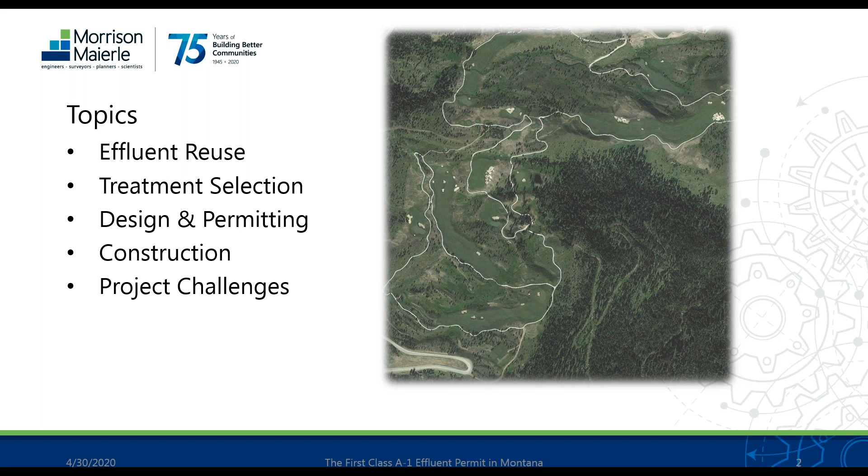So just starting in on the Class A1 standard, and to give us a little background on why we ended up using it. The Circular DEQ2 Appendix B includes Class A1 standards, and that dates back to 2012. Prior to that, landscape irrigation projects were in Chapter 120 of Circular DEQ2, and that had more limitations, specifically to agronomic uptake with respect to nitrogen.

And with this Class A1 standard, one of the main reasons we looked at it was that we would be able to open up some opportunities with either landscape irrigation, groundwater discharge, or even looking forward to a surface water permit later.

Some of the high points I'll point out are BOD and TSS need to be 10 milligrams per liter or less. The total coliform, we're looking at 2.2 CFU per 100 milliliters or less. Total nitrogen being 5 milligrams per liter or less. And then the filtration requirement keeping us at 2 NTU, which isn't listed here, but it's implied. One of the advantages of Class A1 effluent is related to the groundwater discharge permitting that's typical, and if meeting the Class A1 standard, that is waived.

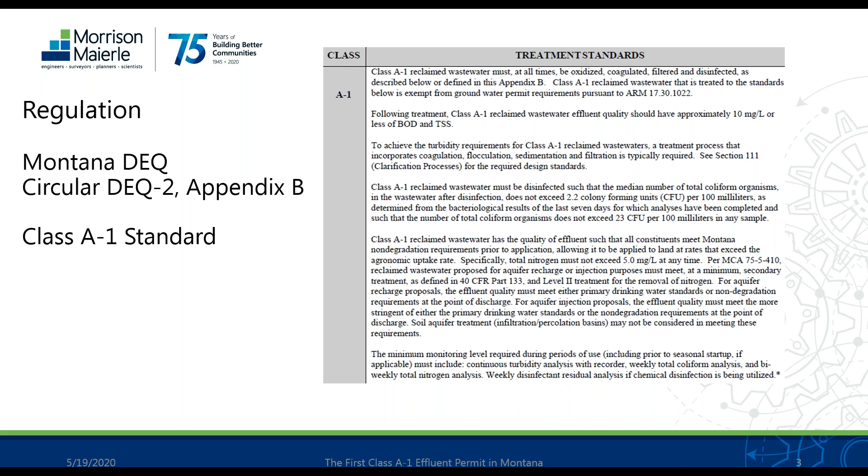So a few of the ways that we can take care of our effluent are on the A1 list here. There's quite a few, and I won't go through them all. I just wanted to put them up so that you can see that there's a lot of yeses under A1 in that column. And some of the ones we focused on were landscape irrigation, groundwater type discharges, and stream flow augmentation, although that would require a surface water permitting effort. And then snowmaking is listed at the bottom there, and that's an ongoing discussion in Big Sky.

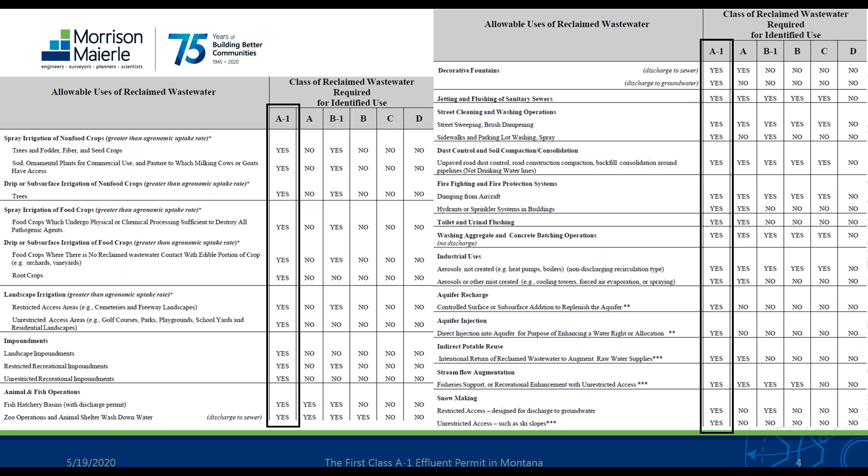So Moonlight Basin Resort has been growing, and it originally started small, so the first plant there was a trickling filter system, and then it had a nearby drain field. Later on, as growth occurred, they put in a traditional collection system and an oxidation ditch treatment plant, and that discharges to a storage pond and goes to forest irrigation.

So the reason for the new plant was really to increase capacity as the development occurs, and also look for a better way to dispose of the effluent as opposed to the forest irrigation, which is at agronomic limits and requires a 200-foot setback. And another reason is Moonlight Basin is committed to using their water resources to the best of their abilities, and so this effluent is an important part of water use on the property.

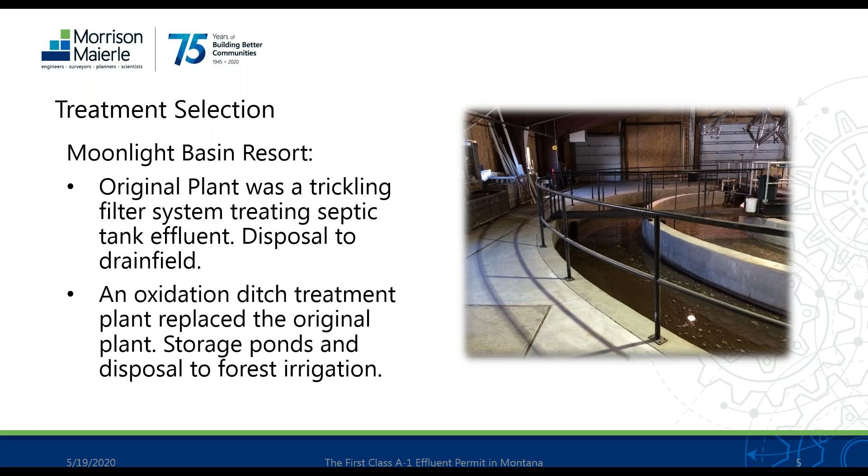So we started out by looking at different treatment options and different disposal options, and in 2015 we finished up a preliminary engineering report. It included growth planning to handle their expanding development, and that would occur over a 20-year period.

We looked at the three drainage basins that traverse over the Moonlight Basin property and how to handle those. Each basin could either have a discharge or an outfall to its own plant, or all the basins could be piped together with lift stations and force mains to have a common single plant. So those options were looked at and considered and then scored.

So as I mentioned, if we were able to bring all the wastewater together into one area, we could do a single MBR. Other options all included using the existing oxidation ditch for one of the existing service areas, and then putting in either oxidation ditches, SBRs, or MBRs for the other 2 treatment sites.

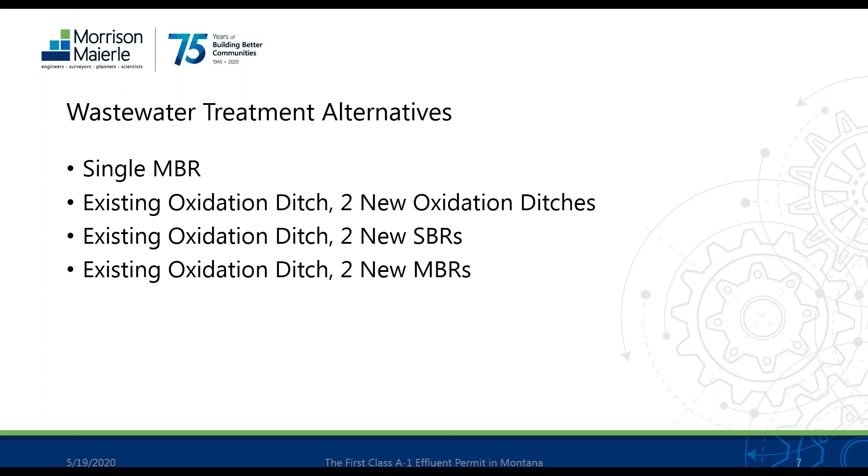So the discharge options I mentioned, the golf irrigation, surface water discharge, and groundwater discharge, each have their own challenges. The golf or landscape irrigation is limited to what the golf course can handle as far as an annual flow, and that's approximately 20 million gallons a year. So that works for a period of time, but as growth occurs and the plants are expanded, that will eventually be one component of potentially many.

On the surface water discharge, there are challenges with that as far as non-degradation with respect to changing the stream flow rate, nutrients, and then temperature. And there can be future study on that. We looked at that as more of a feasibility at this point, and trying to set it up for future consideration.

And the groundwater discharge, we spent some time there exploring the property and looking for sites where there were soils that had infiltration that could handle the quantity of water we were looking at. We weren't able to find any where a large scale drain field or infiltration area could occur at that time. And again, that's something that's going to be, I'm sure, part of the future consideration in studies.

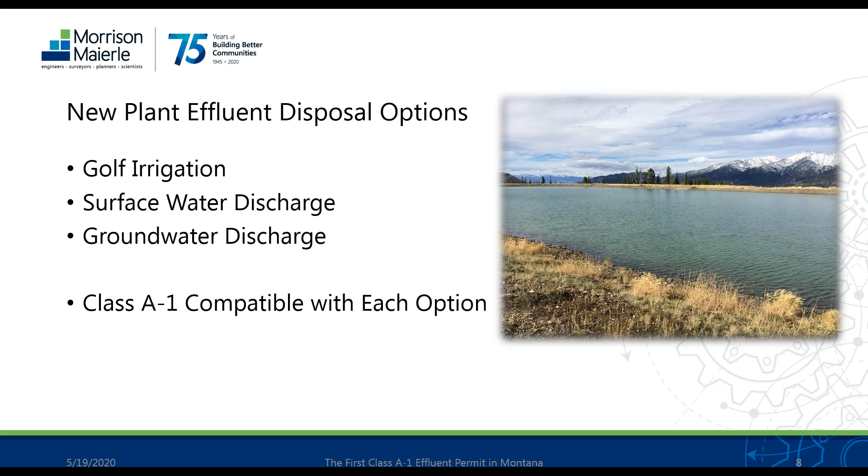On the selection, we chose the existing oxidation ditch and 2 new MBRs. This is just a ranking table that was part of our preliminary engineering report, and it just gives you some of the comparison parameters there that were used to make that decision.

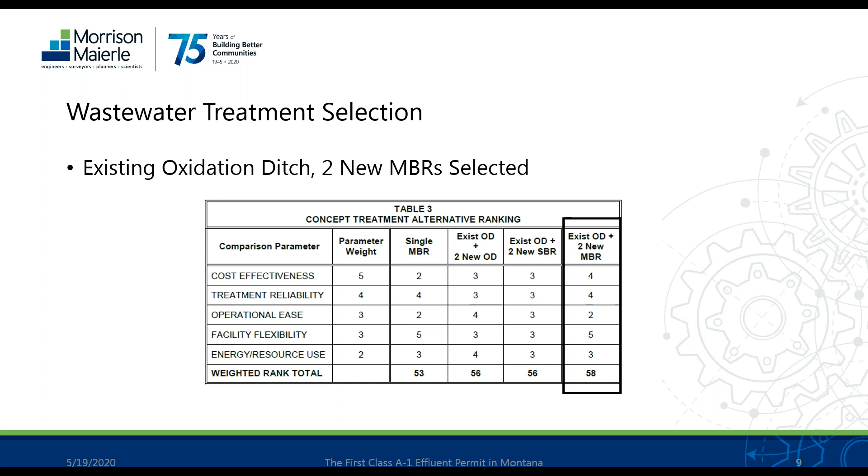So moving on into the actual design, we chose to use a pre-selection approach because of the specifics that the MBR manufacturers have for each of their systems. We wanted to have a competitive selection to protect the client's interests so that they get the best product and the best value, and that also meets funding agency requirements, although this project is privately funded.

So we worked with 3 manufacturers that we're familiar with and that have installations in the state of Montana, and we had them submit their information in an RFP and then conducted interviews as part of that process. And we had good client participation in the process. That was a really great thing. And in the end, 3 engineers reviewed and scored the proposals, and we did that independent of each other and then compiled that scoring at the end.

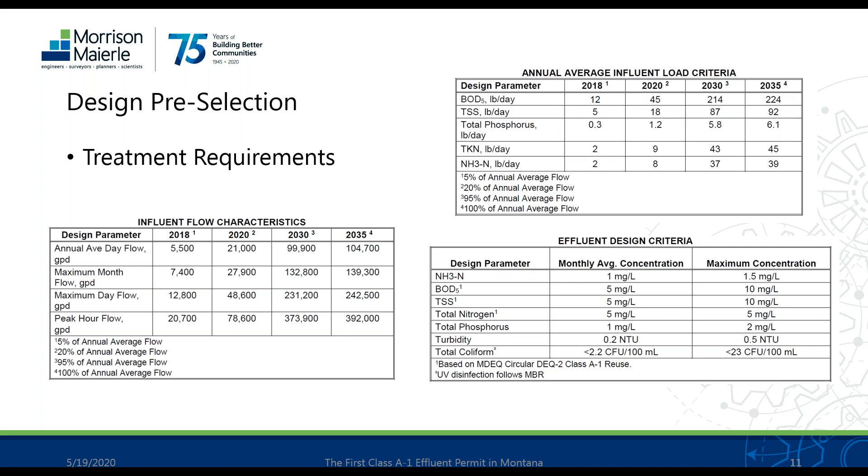Let's see, next slide. So on the MBR requirements, here's just another table out of the RFP. And one of the things I'll point out is we chose to have 3 membrane trains. And the main reason for that was trying to decide how we could handle phasing and how we could handle those low flows. And we decided that it would be a better alternative to have 3 trains, 2 initially, and then the third could be added later. So we start out with 1 duty, 1 standby, and in the future we'll have 2 duty, 1 standby.

All manufacturers needed to provide ultrafiltration in their membranes, and the rest of the parameters just kept us close so that each one could be compared. If they were going to deviate from this, we asked that they have a discussion with us, and we did work on some addendums through the project, although these did not change.

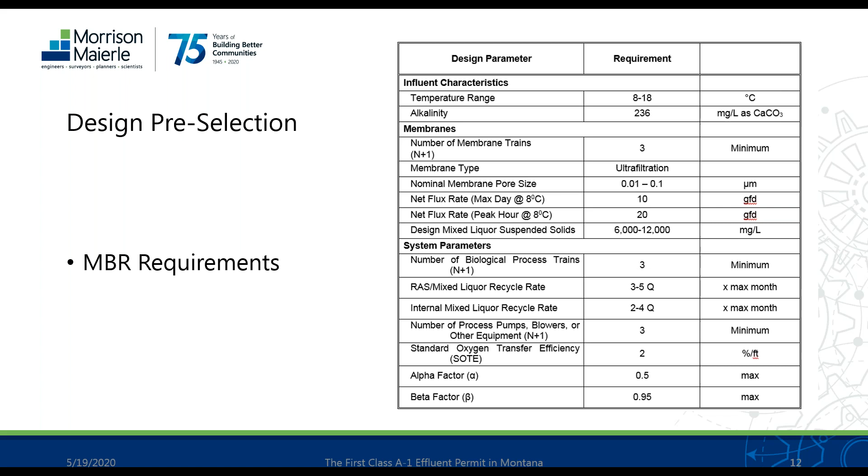So ultimately, GE, or now Suez, was selected for this project, and they provided a system, as I said, with the 3 trains, bioreactors, and membrane basins. They had a 4-stage process, so they have a pre-anoxic, aerobic, post-anoxic, and then an aerobic membrane basin, and that's due to the air scour that goes on in that basin.

They had process chemicals, sodium hydroxide, MicroC, and alum for pH adjustment, carbon source, and then if we needed to remove phosphorus for the alum. On the membrane chemical systems, fairly standard with sodium hypochlorite and citric acid that can be used periodically or on a larger scale, maintenance clean, or drain and clean over the course of operations. And they have a reinforced hollow fiber PVDF membrane. It's a ZeeWeed ZW500.

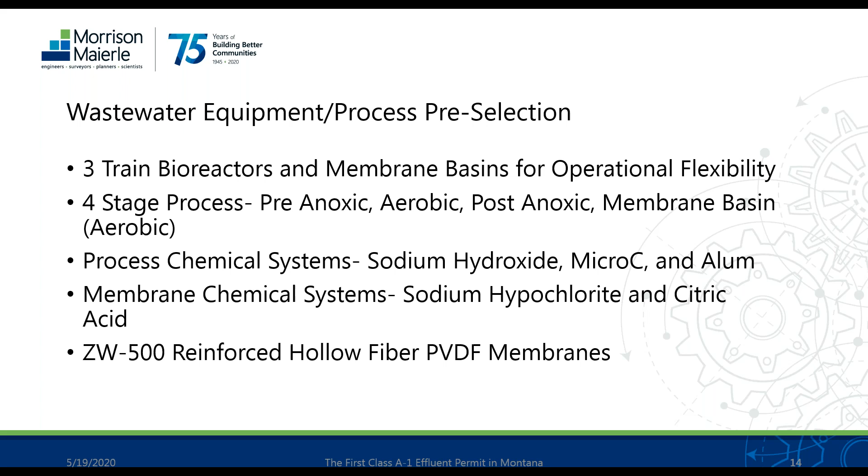So the process that they submitted is shown here. This is a BioWin output representation. So the first anoxic one is 8,300 gallons. The aerobic 1 and 2, they just split them up, but the total is 16,000 gallons. And anoxic 2 and 3 are also split, but total to be 8,300 gallons. We took and reviewed this BioWin output and created our own model to verify the outputs. And that was done for each manufacturer actually to verify.

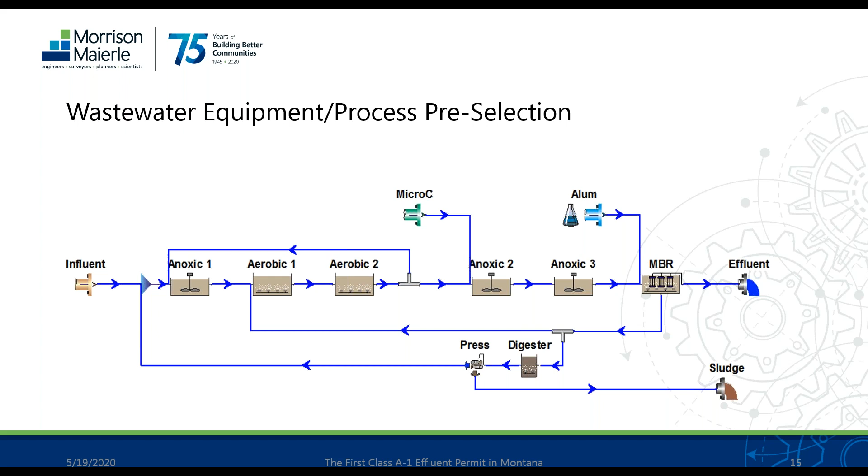So the Moonlight Basin area, this is just an aerial view showing the relation of the existing parts and the new parts. The existing oxidation ditch and effluent pond are over on the right hand side, and adjacent to that is where the forest irrigation has been occurring. So there's a force main coming up to that plant from down below at one of the lodge areas for the ski area, and that flow along with the central and northern service area will be reversed and sent to the new plant that this project is talking about.

And then pond 3 over on the left-hand side is a 16 million gallon pond that currently is filled with water from Lone Creek on a surface water right and irrigated onto the golf course just to the north of that. And we were able to connect onto a pipeline and send water up to that pond 3 area, and that will become the discharge point for golf course irrigation.

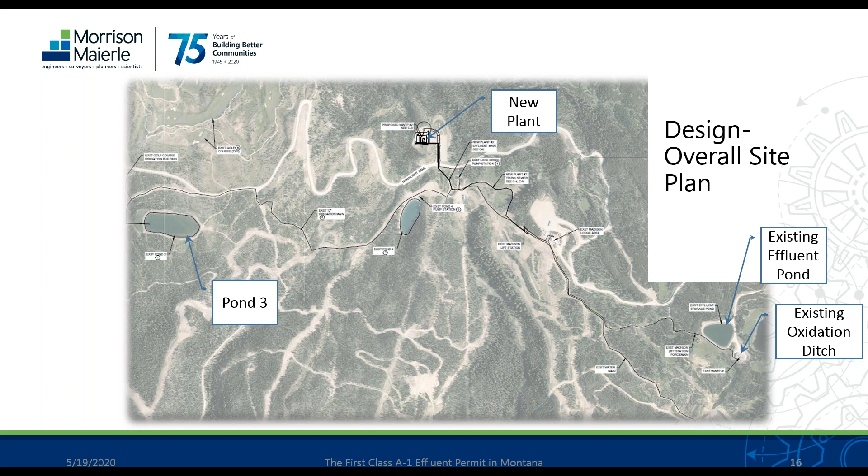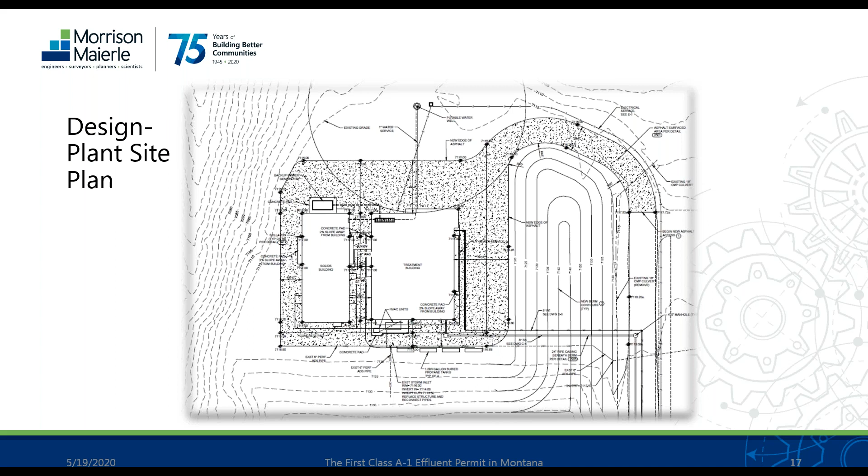So just a couple things to talk about on the plant site plan. Although the building is set up to be seen, it had a lot of architectural items on it to help with the view shed. But one of the improvements to the site was this berm on the right-hand side of the plant, and that just keeps the plant from being a central focus of the view shed looking down. The plant site was already flattened as a previous project, and we ended up putting 2 buildings on, one for treatment, one for solids, and all the processes are inside or under roofs, and this site plan allows space for snow removal and adequate access.

So the plant process flow diagram shown here gives you an idea of some of the processes that are going on. So influent enters the plant, it goes through fine screens, through vortex grit, into an influent pump station, and from there it's lifted up into the bioreactor splitter box. It overflows by adjustable gates into the 3 bioreactors, and then into the membrane basins. Filtrate has to be pumped out of the membrane basins through the UV reactor and into the effluent basins, which supply NPW, back pulse, and effluent discharge.

On the return sludge streams, those are all pumped in the bioreactor, and the waste stream is pumped to the digesters in the solids building. Solids can be pumped from the digesters into the dewatering press or to load a truck. You can see here we have land application either by liquid or by cake.

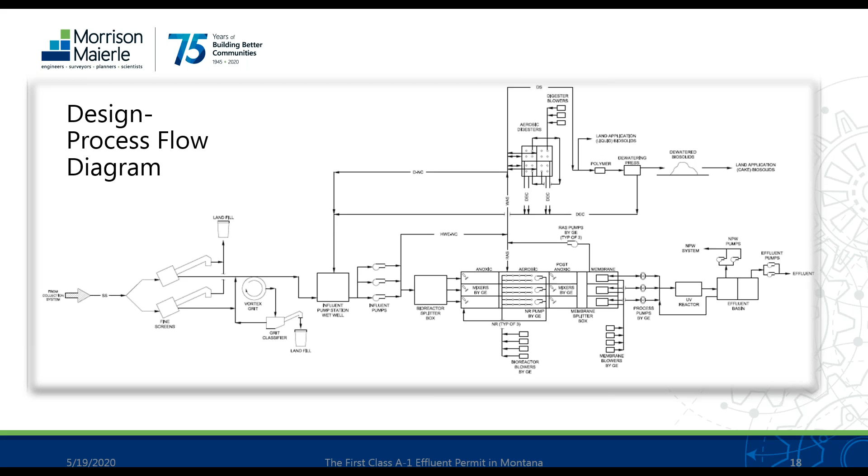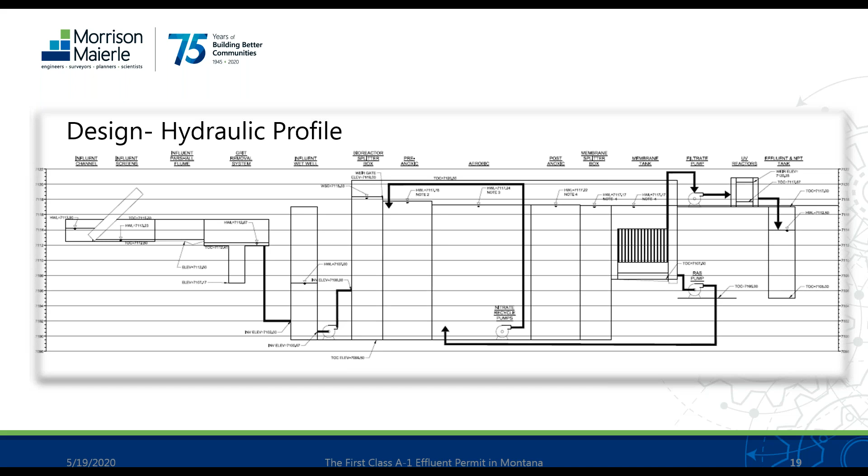So the plant layout, this is the main building. We, like I mentioned, kept the processes under a roof and heated in this case, just due to the climate and the snow load that there would be, and icing. So on the upper right, we have our headworks, which is separate from the rest of the building. It's ventilated at 12 air changes per hour, and it's a Class 1 Div 2 space. Then the rest of the plant is unclassified.

The chemical feed areas are separate off to the bottom right, and mostly each chemical has its own area. There are a couple chemicals that are allowed to be together; there's not an incompatibility issue there. We provided an office, laboratory, restroom, and laundry area for the operators on the upper left. And then there's a dedicated electrical room.

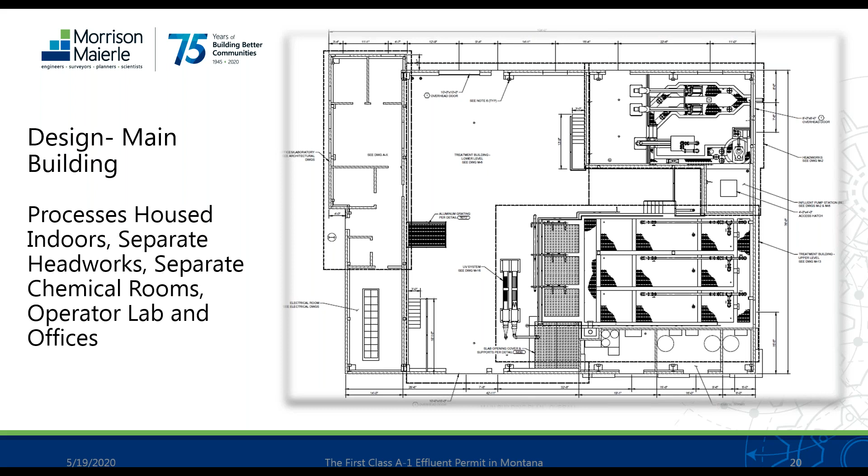So underneath that level, there is a lower level, and this is to help with providing flooded suction to our pumping systems. And so on the right-hand side, you can see the 3 influent pumps. They're able to be in a dry pit configuration, taking water from the influent pump station wet well. On the membrane area, we're able to pump mixed liquor out of the membrane basins in a flooded suction configuration. And then on the NPW and effluent pump skids, we're able to also pull those out with flooded suction.

So the lower level utilized the footprint the best way we could, staying under that roof and being protected in a heated and separate space.

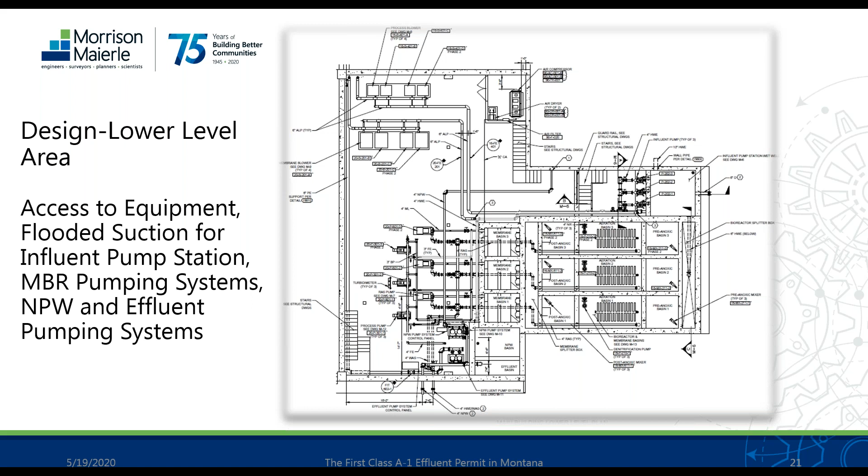This is the solids building. So we have 4 20 by 20 dimension aerobic digesters with fine bubble diffusers. Then we have a piping gallery, which was also designed to allow operations of the valves, either moving water in or out of the digesters without having freezing issues or searching for a valve under a snowdrift or those types of things. And then we have a positive displacement pump down in that gallery in a flooded suction configuration that can feed our screw press. And then on the left-hand side, our digester blowers feed air to the basins and the diffusers.

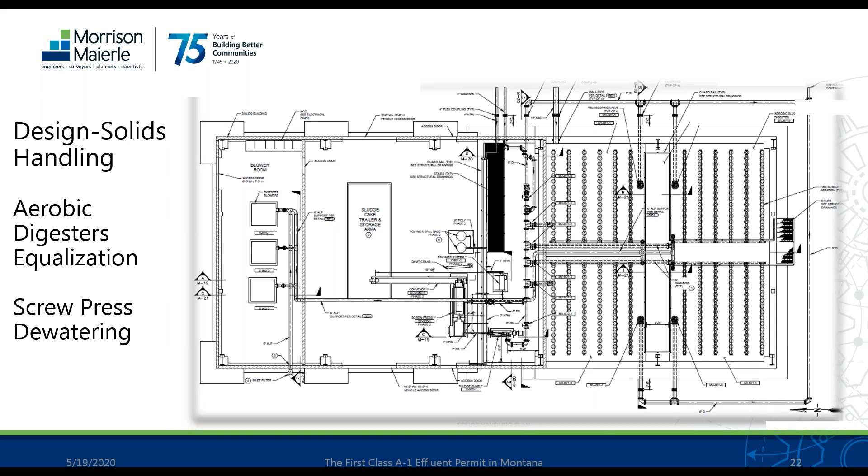So permitting of the project, we worked through plans and specs and finished with a submittal to DEQ in August of 2016. And while it was under review, we were asked about information on the storage pond 3 and the golf course irrigation. And so we spent some time going through that, doing some further study, and having a geotechnical report put together for the pond, and then also looking at the golf course and where the sprinkler heads are aimed, and making sure that we don't discharge water to a surface water drainage. And so on January 23rd, 2017, we had our DEQ approval for the project.

So this photo here was just showing doing a leakage test on that pond 3 liner. So as part of the permit, here are the monitoring requirements. Since it's not a groundwater discharge permit or a surface water discharge permit, these were written into the actual approval for the plant. And you can see that in year 1, there's a lot more sampling, and then it tapers off at 4 and beyond.

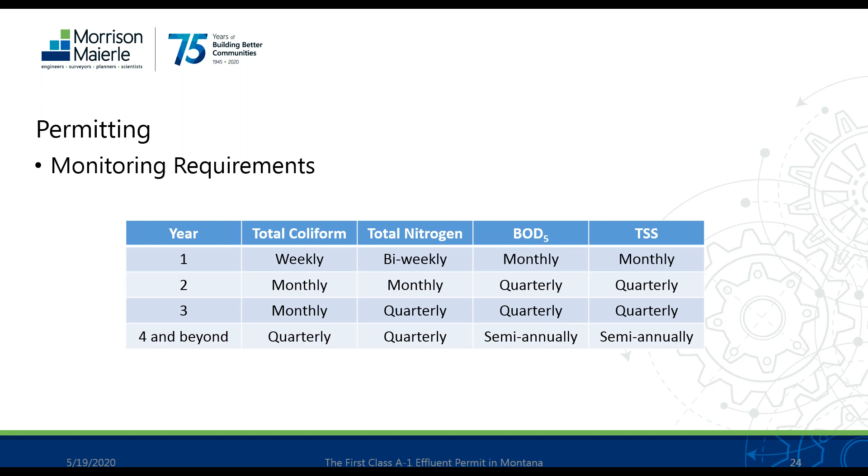So construction of the project, after a pause of approximately a year, just due to development needs and the client programming this project, we started into the construction with bids due in January 2018, and Dick Anderson Construction was the low bidder. And over the course of the next few months until May, we worked through budget issues and some value engineering; when they looked at the site and how things were going to go together, they had some ideas, and that gave us enough time to begin work in May 2018 after ski season was finished and when weather permitted.

So the project was completed in November 2019, and the final amount was 8.63 million. And the photo here just shows about 1 or 2 days into it, just clearing the site and starting to dig for the large water holding basins.

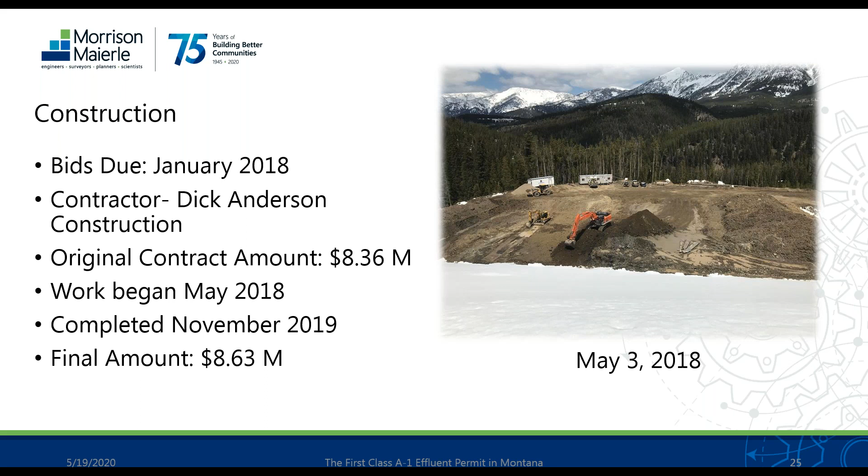So one of the nice things about this site is the hillside behind it provides a really good place to take photos, and so we were able to pick up a good timeline on the project, and you can see in the first couple months here, July and August, as structures started going up, they focused on the solids building, as it was a little bit simpler construction and not quite as deep, and then they moved to the bioreactors, which are 18.5 feet water depth, and started building those up.

One of the design aspects that we focused on was providing a base slab that we could then build up off of and try to limit sequencing as best we could, because each pour requires curing and then concrete breaks to move to the next level or a backfill. So keeping sequencing down was an important part of that design.

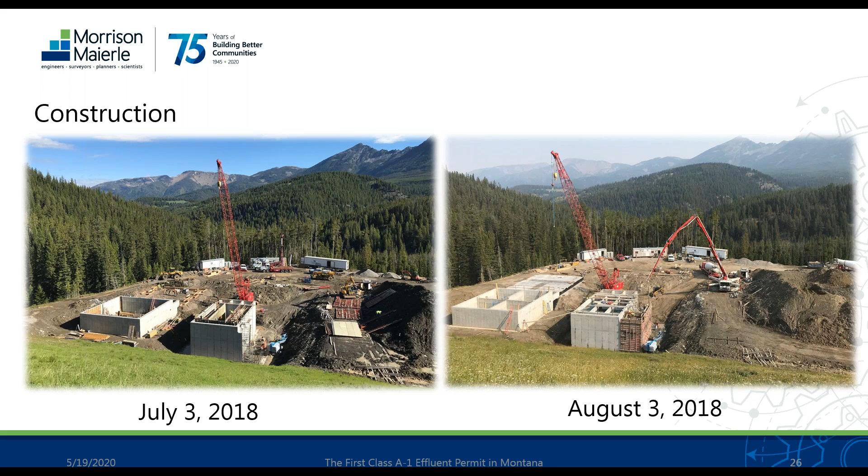So moving into the next few months, you can see that water testing occurred in the digesters, and we started to see the treatment building coming up out of the ground. And on the September photo, you can see the steel structure that forms the floor between the ground level and the lower level, and that structure allows for vehicles to be driven through that bay on the north end of the bioreactors. And then in October, you can see the building going up over the solids area, and then in the main building, we can see some of the structure work in the headworks. You can see the screening channels taking shape on the lower right, and then the gravity sewer was being installed.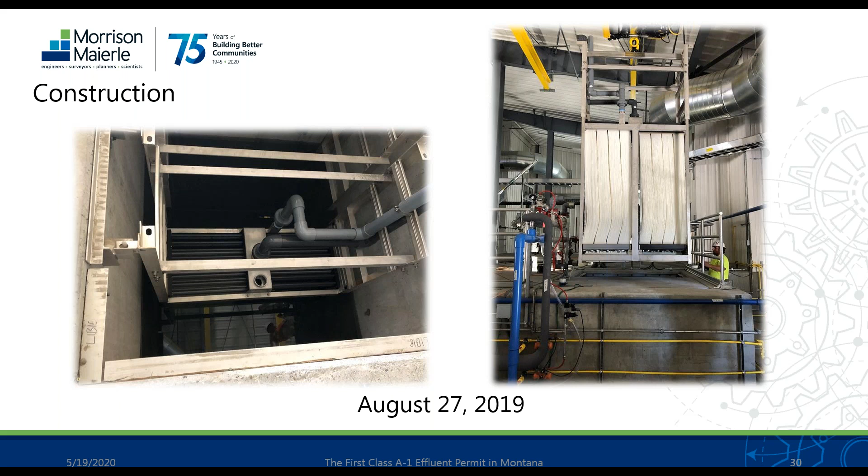So at the end of September, equipment was started up and they were able to start seeding the plant. And so, like I mentioned before, the volume of one train of the basins is approximately 32,000 gallons. And so that was brought up from the Big Sky County Water and Sewer District, and they have an SBR treatment plant approximately 8 miles away in the Meadow Village.

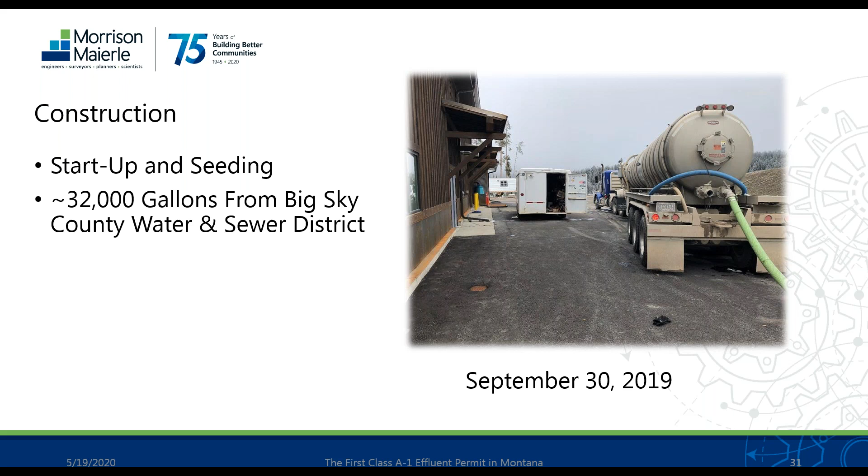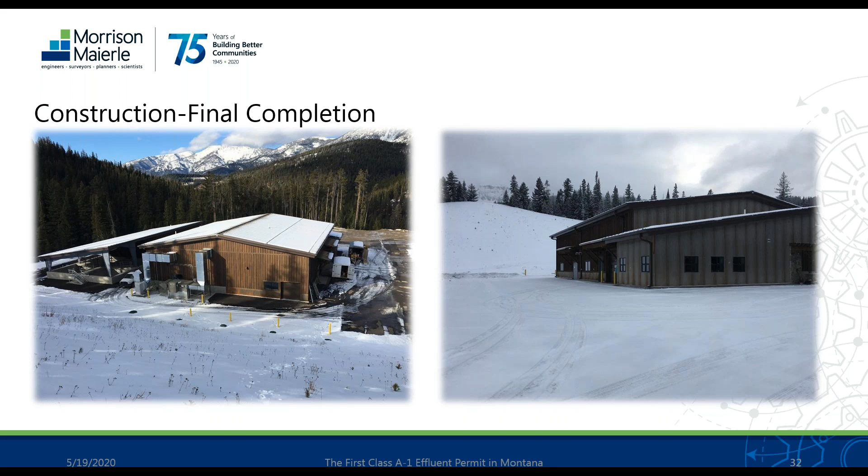So this is the plant when it was completed, and you can see that the building has a lot of those architectural elements I mentioned to fit in with the area, and most people who have seen it don't attribute it to being a wastewater plant at all. So we'll go through a few photos of some of the systems in the plant.

So we have the fine screens on the left-hand side there. We have two millimeter fine screening systems. And then on the right-hand side, that's the dry pit area with the 3 influent pumps. We have the ability to meter flow out of that influent pump station up into the bioreactors. And then we allowed a stub for a future equalization basin pipe if needed. And on the digesters, there's actually the ability to feed influent or mixed liquor into those if we ever need to. With the size and the volume there, we have some ability to use those as equalization. So that's an important part of the plant as far as allowing for flexibility if there's maintenance needs.

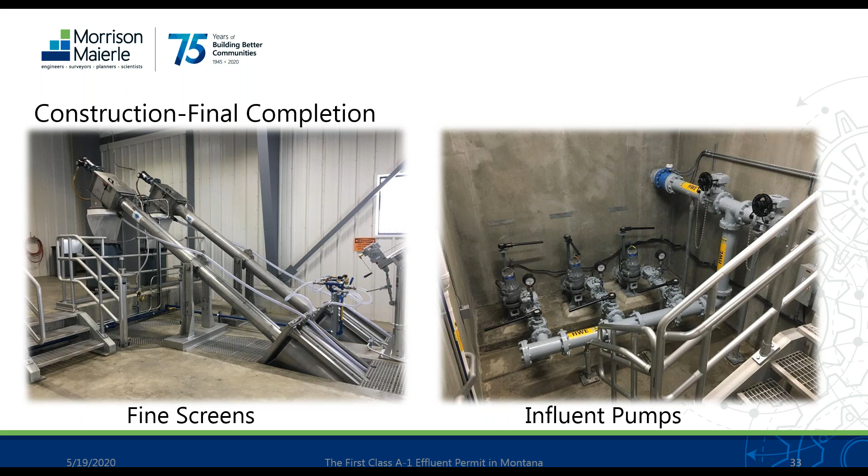On the main floor here, we can see the finished bioreactors and UV, and up on top of the bioreactors we have grating where it's accessible to walk up and look at the instruments, and we can access the mixers that are rail mounted, or there's rail mounted pumps that are part of the recycle stream from the aerobic back to the first anoxic basin.

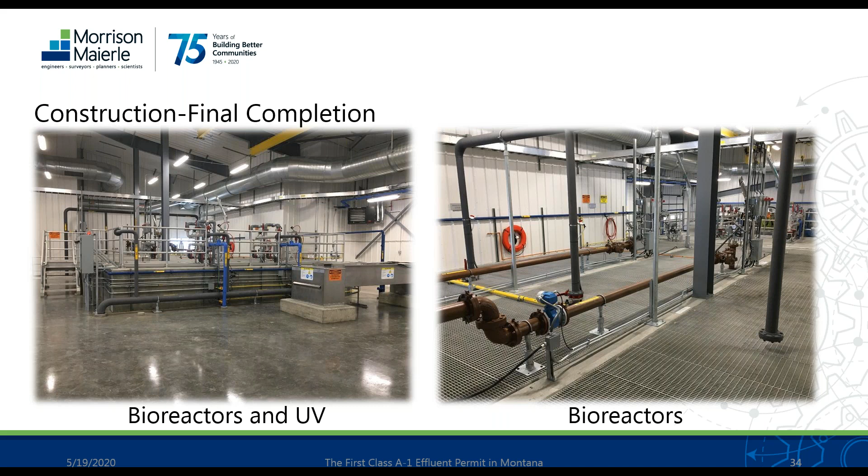In the lower level, we have our blower area, and part of the consideration of having the blowers in the lower level was just noise and keeping that away from the operator admin area upstairs. The blowers actually are very quiet, but that was part of the reason to have those in this lower level.

And similarly with the pumps on the right hand side, we have filtrate pumps and mixed liquor return pumps for the membrane systems located in that lower level. All very accessible and separate from the upper level, where they have some ability to store equipment or move vehicles through.

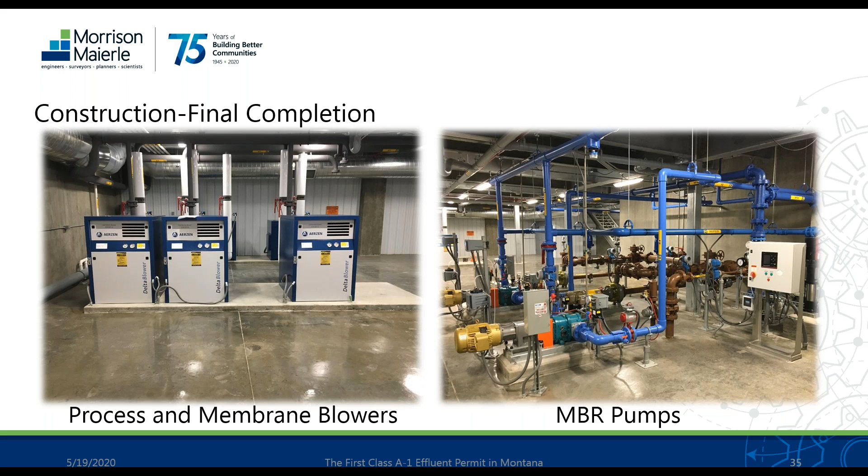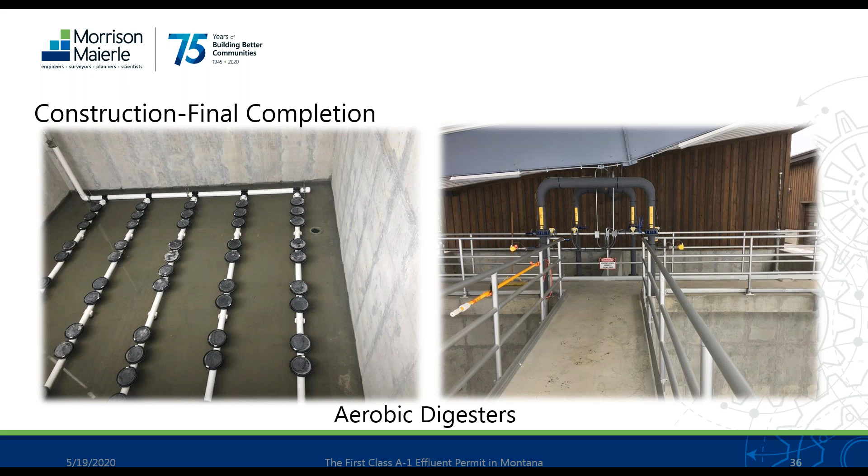In the digester area, just showing the diffusers in one of the digesters, and then we have a nice access walkway that we can get to all 4 digesters and the telescoping valves and the airflow monitors or any other isolation valves. And that's all under the roof. So like I mentioned before, there's not going to be a lot of snow on this walkway, which is nice.

So I'll just go through a few of the challenges and how we approach those on this project. Starting out looking at how to handle this treatment and disposal, it seems like a daunting task, but we just had to start and compile this preliminary engineering report to study and recommend the solution that we came up with. And only after you start putting together all that information does it start becoming more clear what needs to happen.

And we had a really good client, they wanted to participate and be a part of that, and that's always helpful because ultimately it's their facility that they're gonna run, and it's gonna meet their needs in the future.

With first of kind permitting, just doing upfront research and homework to figure out if what you're proposing is gonna be approvable, and looking at maybe what people are doing in surrounding states or other areas, and then communicating with regulators up front. And we had worked through some of those communications and meetings definitely up front, and it felt like Class A1 effluent had some excitement, and people were very supportive.